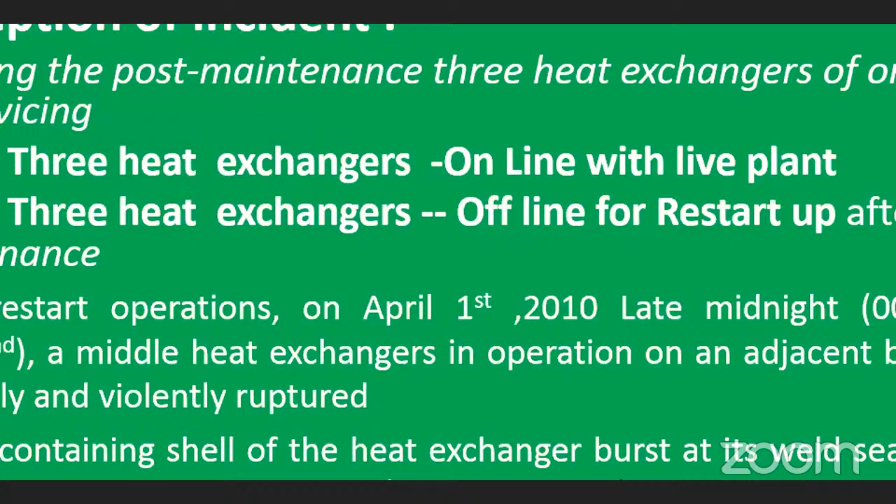The pressure containing shell of the heat exchanger burst at its weld seams, expelling a large volume of very hot material, greater than 500 degrees, containing hydrogen and naphtha, which spontaneously ignited upon contact with the surrounding air. Because of the heat already available, it got exploded.

Because it was an explosion, it took 3 hours to burn out. The incident was the statewide worst industrial disaster in 50 years - in 50 years, it was the worst accident ever to happen.

So just a small figure to explain how it looks - there are two banks, bank 1 and bank 2, each containing 3 heat exchangers, 1, 2 and 3. Bank 1 is live. This second heat exchanger in bank 2 has exploded. Bank 2 was under post maintenance, and they were going to restart it after ensuring bank 2 was in condition.

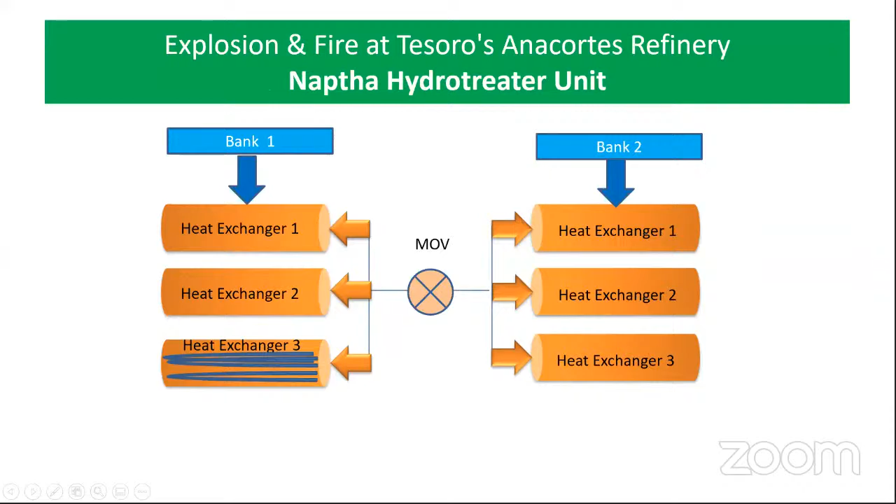Next. Okay, but it's not changing here. Anyhow, on the shell side—no, this is heat exchanger 3, but actually it should be heat exchanger 2, which is broken on the shell side because of overheating. It has raw naphtha and hydrogen in the tubes, and on the shell side the hot fluid is there, which has a high temperature above 500 degrees Fahrenheit.

The reason for failure is HTHA damage, which is high temperature hydrogen attack. You can see the API RP guidelines showing the Nelson curve, because of the carbon reacting with hydrogen. The relationship is between the partial pressure of hydrogen and high temperatures. So it is because of that reason, that is the quality issue and reason for the failure. Okay, next.

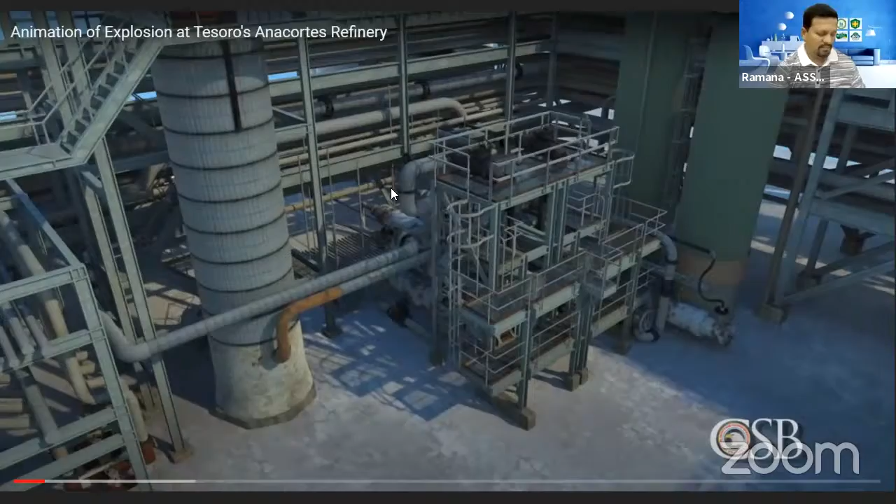April 2nd, 2010. The Tesoro Refinery in Anacortes, Washington. A nearly 40-year-old heat exchanger violently ruptures, causing an explosion and fire that kills 7 workers, the largest loss of life at a U.S. refinery since 2005. The Chemical Safety Board launched an investigation and determined that the heat exchanger catastrophically failed due to long-term damage from what is known as high-temperature hydrogen attack.

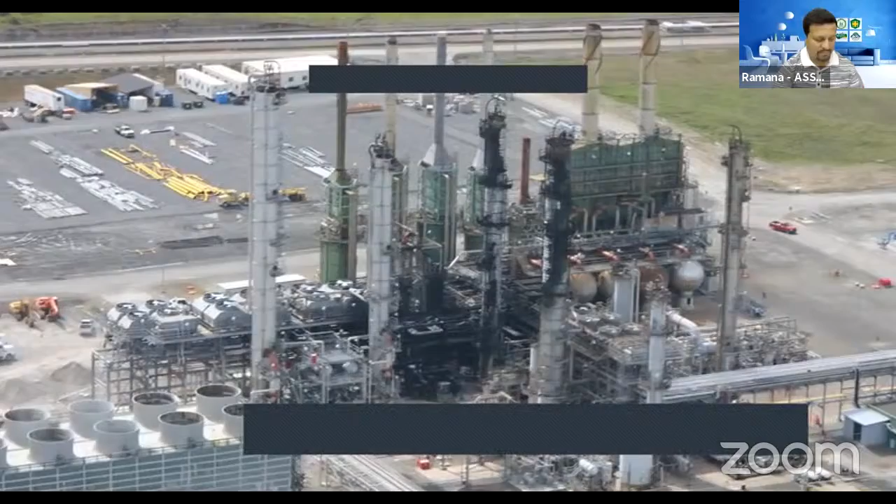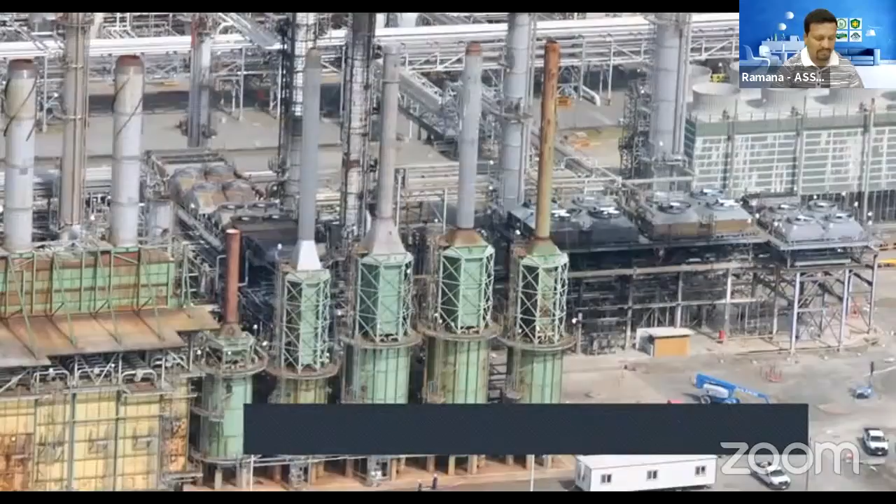The Tesoro Refinery in Anacortes is an 800-acre facility located approximately 70 miles northwest of Seattle. The refinery produces a variety of products, including gasoline, diesel, jet fuel, and asphalt.

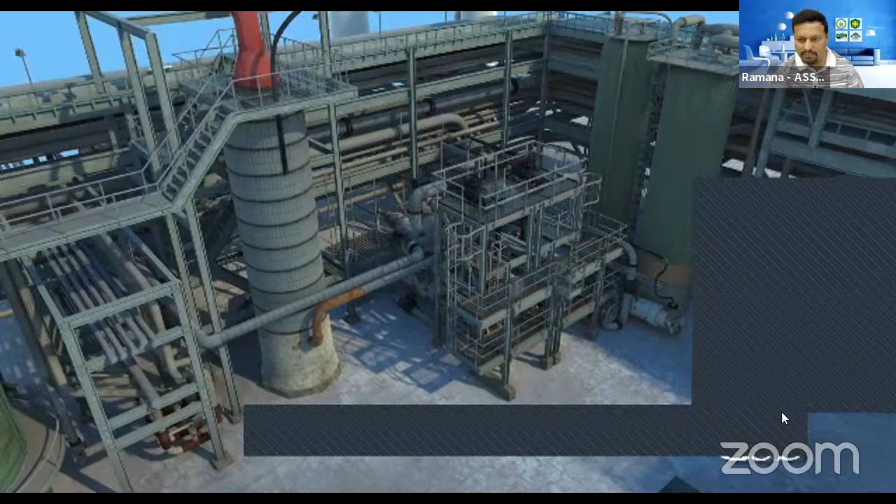Within the refinery's naphtha hydrotreater unit, raw naphtha, a light component of crude oil, is treated to remove nitrogen, sulfur, and oxygen impurities. Before entering the unit's reactor, the raw naphtha and hydrogen are preheated inside pressure vessels called heat exchangers. The unit contains 2 banks of 3 heat exchangers supported by a 3-level steel structure.

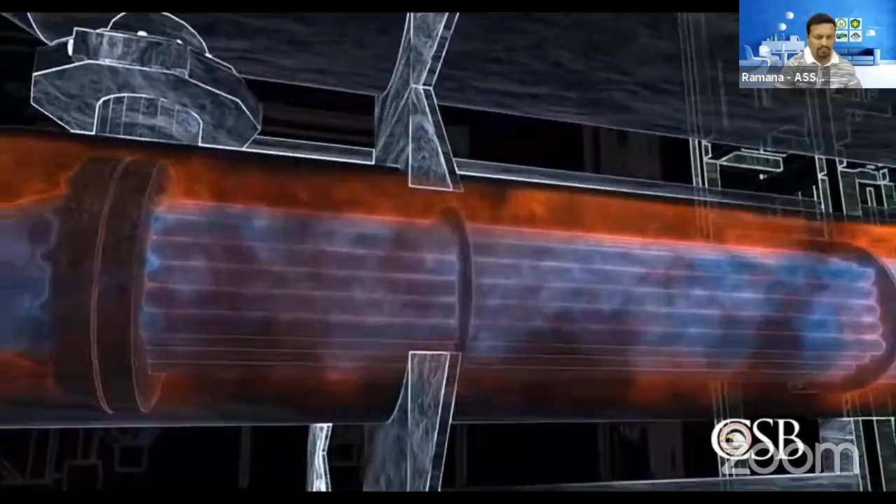Each heat exchanger consists of a bundle of tubes inside a steel shell. Hot fluid exiting the reactor flows through the heat exchanger shell, while cool fluid headed for the reactor flows inside the tubes. Heat is exchanged through the walls of the tubes.

Every 6 months, the heat exchangers are taken offline to be cleaned because of fouling, a common occurrence when operating heat exchangers in this type of service. As the raw naphtha is heated, a scale-like material forms and deposits onto the inside of the tubes, hindering the transfer of heat in the exchangers.

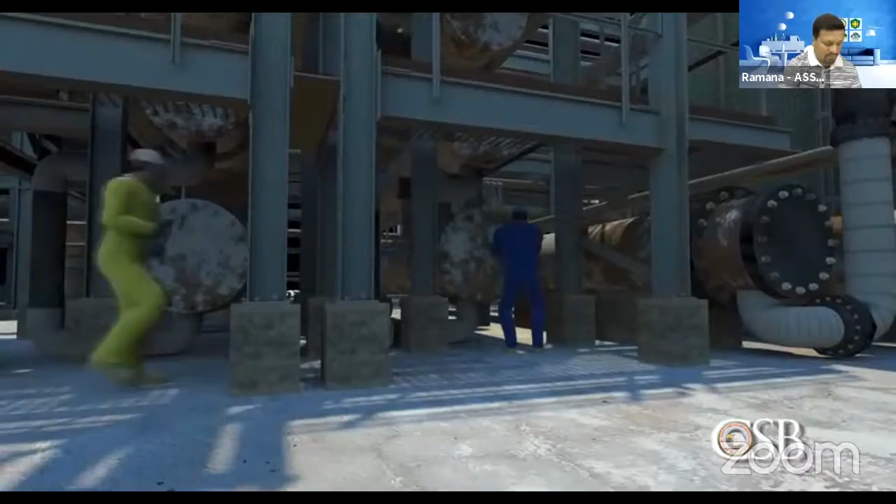On March 28, 2010, 1 bank of heat exchangers was taken offline and disassembled for cleaning, while the other bank remained in service. This allowed the unit to continue to operate. By mid-afternoon on April 1st, the cleaning was complete, and operators initiated the startup of the offline bank of heat exchangers.

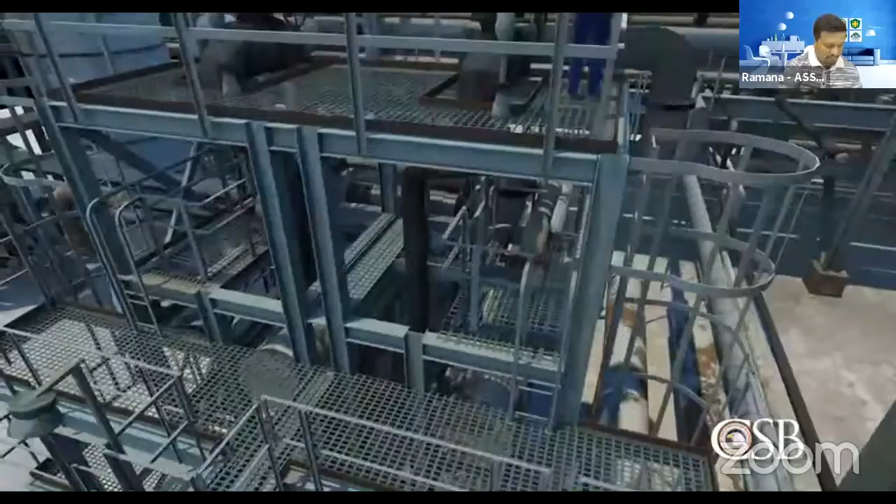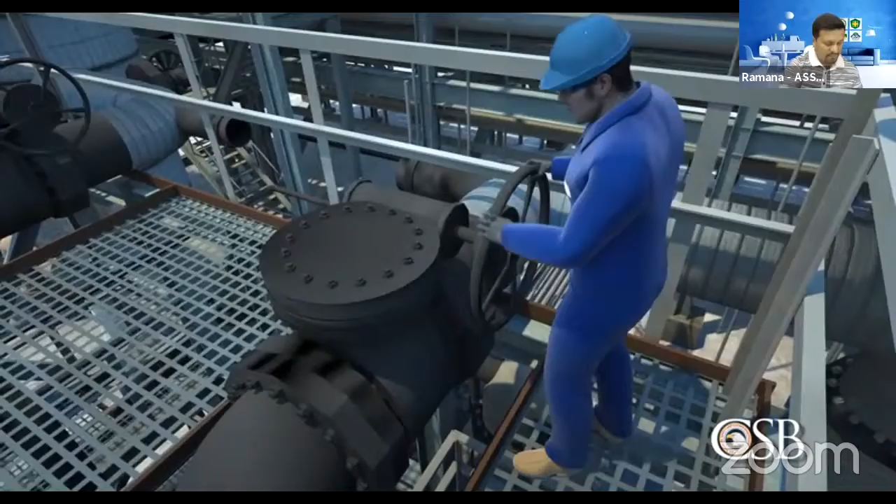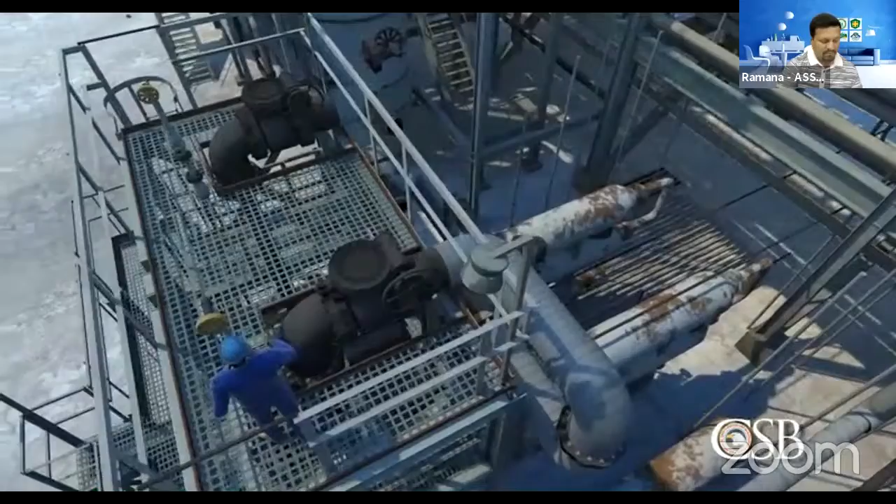The procedure required an inside board operator monitoring the control console and 1 outside operator opening and closing large manually operated valves. But the heat exchangers had a history of developing leaks during startup, something that refinery personnel had come to see as normal. Additional operators from other nearby units were called upon to assist with the startup, including mitigation of potential leaks. By 10:30 p.m., the outside operator was joined by 6 workers from other units within the refinery. The 7 workers were located around the heat exchangers, where startup activities continued past midnight.

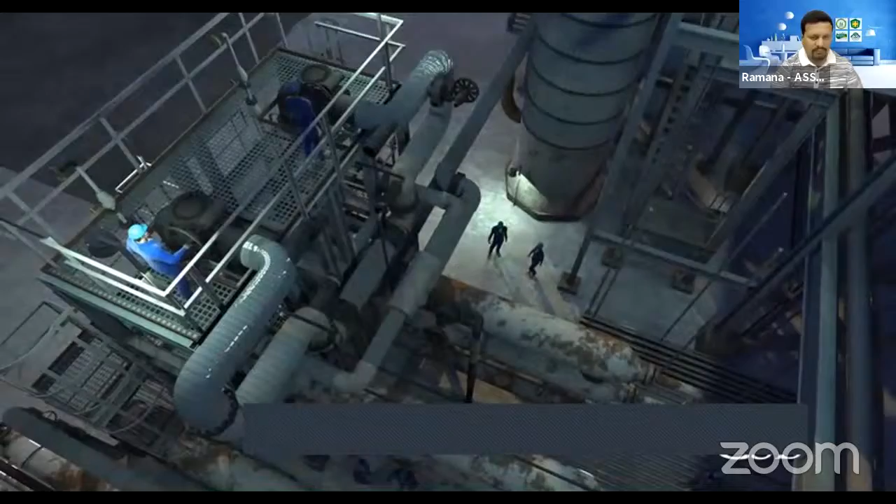But unknown to the workers, the steel shells of the middle vessels in both banks of heat exchangers had been severely weakened due to cracking caused by high-temperature hydrogen attack. This occurs when tiny hydrogen atoms diffuse into steel at a high temperature, then react with carbon in the steel to form methane gas. The larger methane molecules, unable to diffuse out of the steel, accumulate, stressing the steel and over time causing fissures. In both of the middle heat exchangers, the fissures grew and connected to form large internal cracks. One such crack was 48 inches long and extended more than 1/3 of the way through the vessel's 1-inch thick shell.

Shortly after midnight, the temperature of the fluid exiting the tubes of the online bank of exchangers increased about 75 degrees over the span of 3 minutes, a temperature increase that was typical and observed in previous startups. But the middle heat exchanger was so severely weakened from high-temperature hydrogen attack that it likely could not withstand the stress caused by the rapid temperature increase.

At 12:35 a.m., employees working at a nearby process unit heard a loud hissing noise when vapor began to leak as the heat exchanger cracked at its weakest point. Seconds later, the exchanger violently ruptured. Hot hydrogen and naphtha vapor rapidly vented from the exchanger and spontaneously ignited upon contact with air, resulting in a massive fire that consumed the heat exchanger structure.

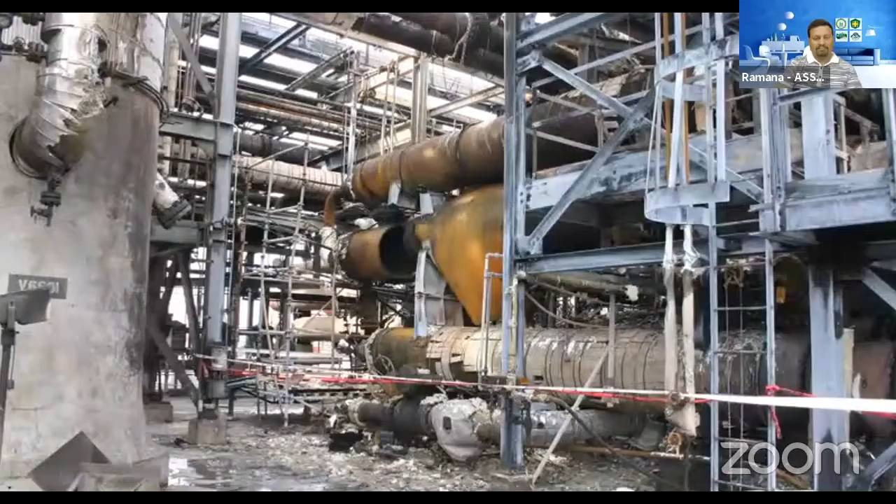3 of the 7 operators died at the scene. The other 4 operators were transported to local burn centers with severe injuries. 2 died within hours. The other 2 succumbed within days.

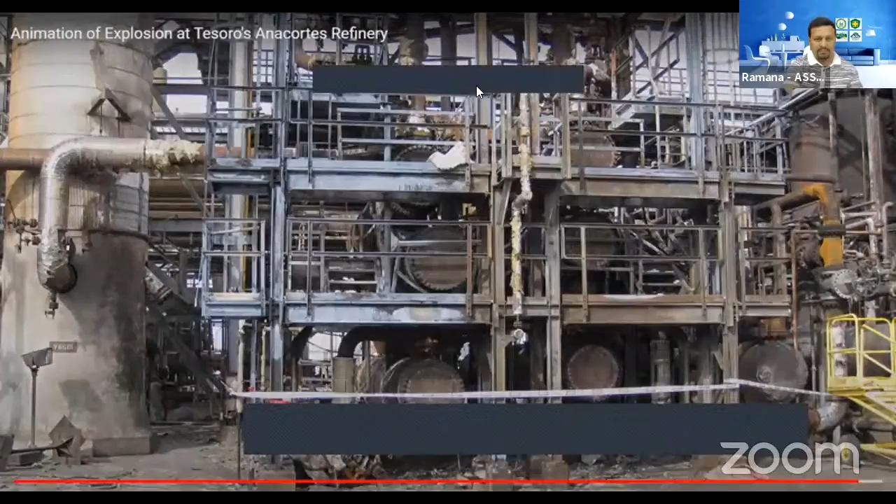So coming back to the presentation, the picture clearly explained everything, better than me.

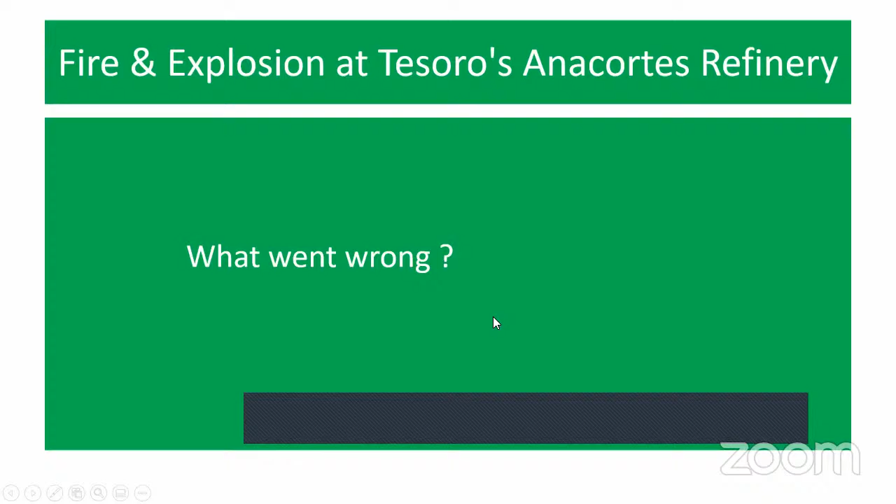Sorry, but I just want to explain once again the investigation and cause of the incident. The causes are inadequate mechanical integrity, which is the PSM element mechanical integrity, including inadequate mechanical integrity programs, including preventive maintenance to control damage mechanisms and aging equipment at chemical facilities. So it is one of the major causes, mechanical integrity programs.

Okay, they don't have it. And the common hazard of damage mechanism is HTHA, that is high temperature hydrogen attack, which is actually a methane reaction, referenced in API RP 941, the Nelson curve, which indicates this HTHA mechanism. It's a damage mechanism that occurred in the heat exchanger made of carbon steel, a material considered unfit for the job.

These recommendations are given in API RP 941 Nelson curves, that's about carbon steel. That is why it is referred as API RP 941. The heat exchanger was made of carbon steel, a material considered unfit for the job.

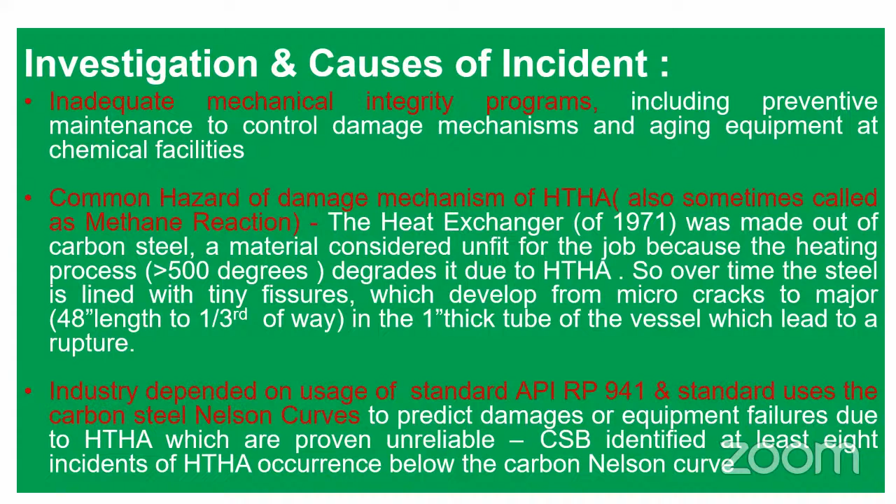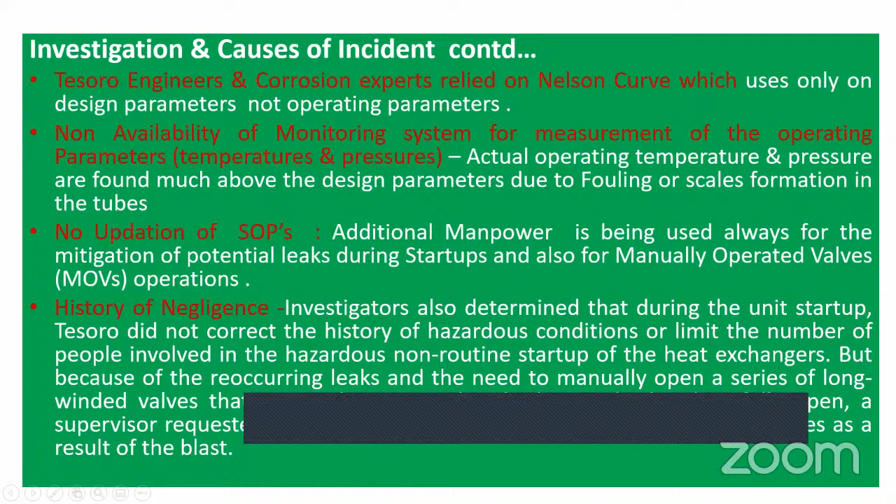The heat process was more than 500 degrees centigrade and it degrades due to HTHA. Over time, the steel lined up with tiny fissures which developed from micro cracks to major cracks, which grew to 48 inches in length, about 1/3 of the way into the 1 inch thick tube of the vessel, leading to a rupture. This was also observed by the Chemical Safety Board.

Industry depended on the standard API RP 941, which uses carbon steel Nelson curves to predict damages or equipment failures due to HTHA, but this was proven unreliable because it only depends on Nelson curves and design parameters, not on operating parameters. This proved to be not useful.

CSB identified at least 8 incidents of HTHA occurrences below the carbon Nelson curve. This means the Nelson curves give design parameters, but even below those design parameters, many incidents occurred - around 8 incidents due to HTHA in the same industry.

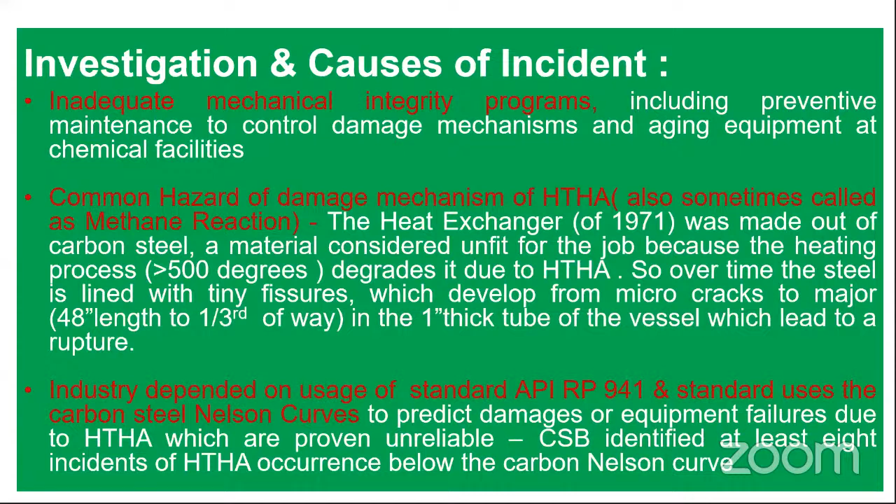Investigation and cause of the incident continues. Tesoro engineers and corrosion experts relied only on Nelson curve, which uses only design parameters, not operating parameters.

Generally people say this design - many industries only look at the design parameters, thinking they are below design. But what happened is, even though temperatures and other parameters were below the design parameters, it failed because of the operating parameters which were not monitored.

Non-availability of a monitoring system for measurement of operating parameters, temperatures and pressures was one cause. Actual operating temperature and pressure were found much above design parameters due to fouling or scale formation in the tubes, because of lack of monitoring they exceeded the design parameters. There was also no updation of SOPs.

There is a contrast here with the previous point: below design parameters many incidents happened, and this incident happened above the design parameters. So they cannot rely on Nelson curves and design parameters only - that is one of the causes. Also, there was no updation of SOPs.

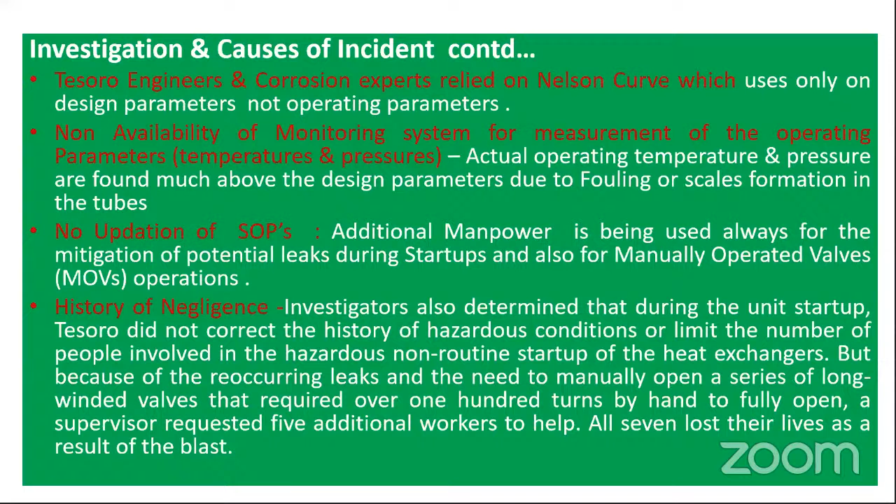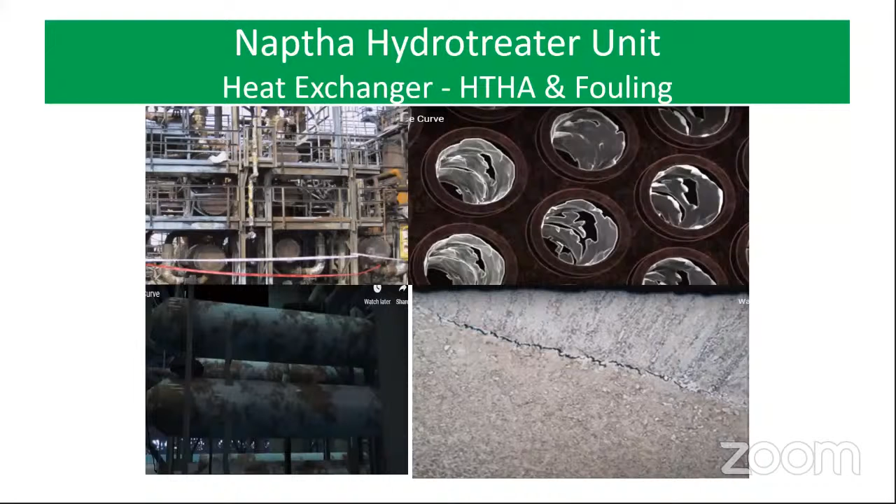This next picture clearly shows the HTHA and fouling of the tubes, which is the cause of the failure.

So, recommendations. CSB has given some recommendations to revise API RP 941 steels for hydrogen service at elevated temperatures and pressures in petroleum refineries and petrochemicals. Clearly establish the minimum necessary shall requirements to prevent HTHA equipment failures using a format such as that used in ANSI and API.

Use inherently safer materials such as steels with higher chromium and molybdenum content. Require verification of actual operating conditions to confirm that the material of construction selection prevents HTHA equipment failure. Prohibit the use of carbon steel in processes that operate above 400 degrees and greater than 50 psia hydrogen partial pressure.

State and national chemical safety regulations shall be designed to protect workers and surrounding communities from potentially catastrophic chemical releases, to adopt more rigorous process safety management attributes and features based on the CSB's regulatory analysis, to prevent the recurrence and reduce the likelihood and consequences of similar incidents.

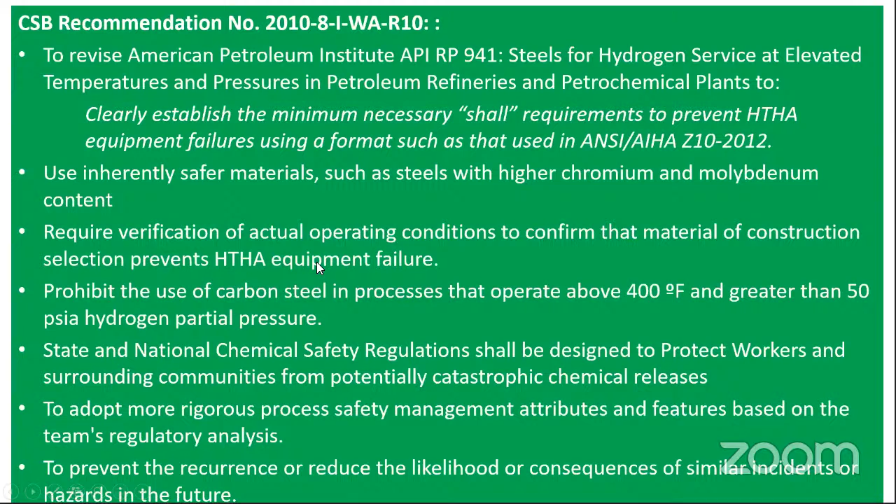Review the process hazard analysis and damage mechanism review programs for refineries in order to validate the damage mechanism. Here the HTHA was the damage mechanism document; process hazard analysis has to be done and safeguards have to be in place to confirm the effectiveness of that HTHA mechanism, and increase the role of workers' representatives in PSM.

So those are the steps which are recommended by the CSB, Chemical Safety Board.

Wonderful, Murthy, that's good. This has been a very important incident. Although many people overlook this, learning-wise this has been as important as even Texas City or many other similar incidents. A very deep investigation was carried out by CSB.

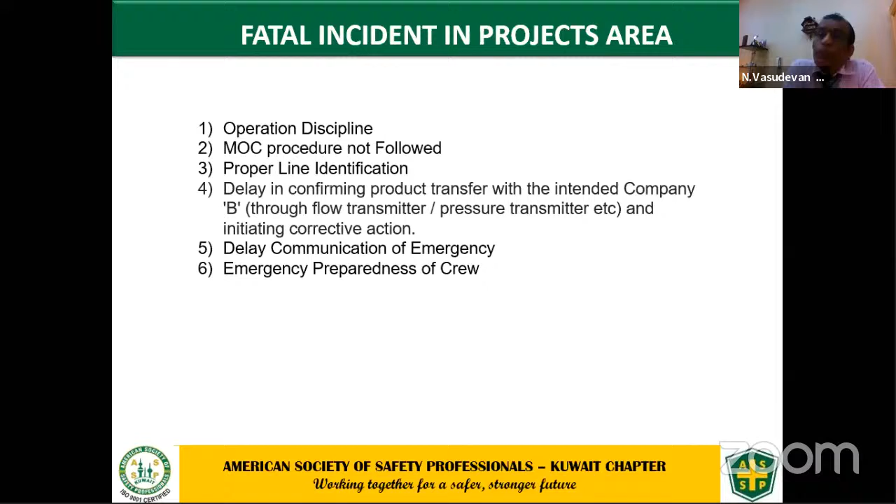So in short, this was my experience. If you have any queries, you can contact me on this email and personal phone which I have shared with you. With this, I would like to give it back to the moderator, and I'd be glad if any questions need to be answered. It's my pleasure.

Wonderful, wonderful, Vasu. This is what I keep telling people - let us share our failures, let us share our failures, and then we make others aware that look, don't touch that, it is hot. So any questions please? Switch on your mic, introduce yourself, and shoot your question to Mr. Vasu.

Go ahead. Good evening. Good evening. Good evening. Yeah, Vasu sir, thank you very much. Your presentation was really an eye-opener for us.

During your presentation, just I got one point. Remember, maybe if we can use lockout tagout for the valves, so there is little chance for the opening and closing of valves incorrectly. This is also something we can address.